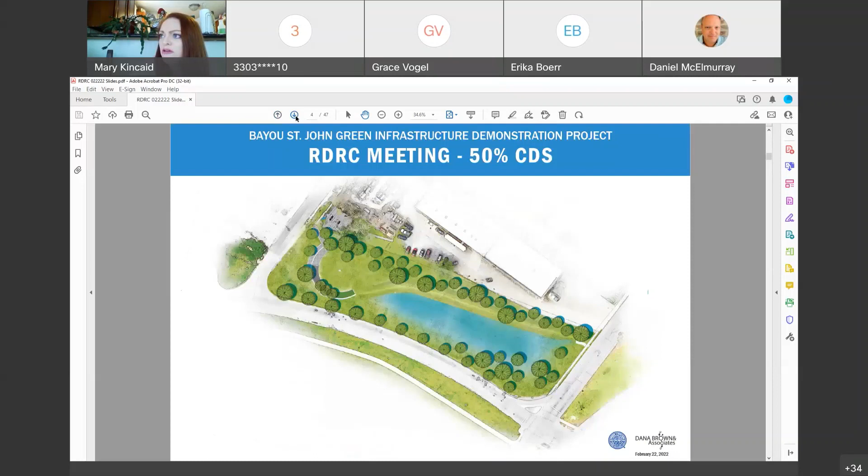for the Sewage and Water Board. Thank you, Grace. Thanks, Mary. I'll intro it, but Danielle and Delaney from Dana Brown's Associates will be actually giving the presentation. This is our newest green infrastructure demonstration project funded by the Sewage and Water Board under our consent decree funds. I'll just let Delaney and Danielle take it away.

I saw them on the call. Are you guys able to unmute yourselves? They might be stuck. Yeah, we can, I think so. This is Jared Zeller, I'm just on the phone. Oh, okay good, got it? Oh yeah, I can hear you now. Go back to mute, okay. Sorry, I was trying to use headphones because I'm at the office today. That's all right. Hi, everyone.

I'm Delaney from Dana Brown Associates, and I will walk you guys through our design.

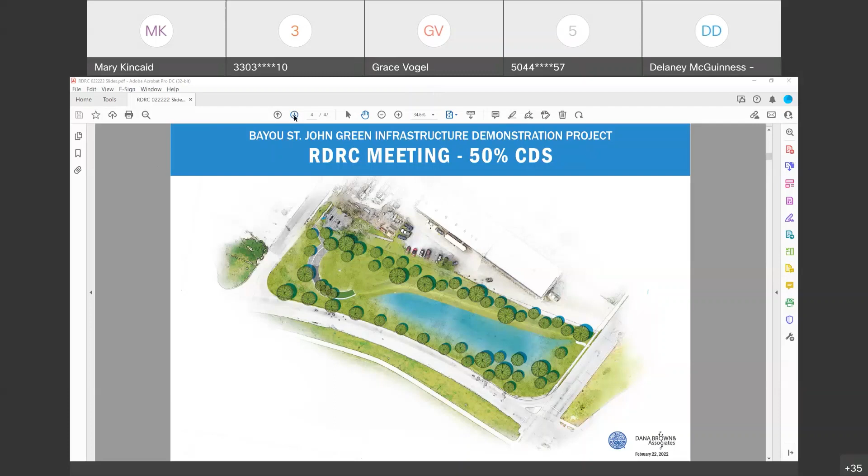So what are we flipping? You guys are flipping the pages? Yes, ma'am, I'm flipping the pages. Can we go to the next page, please? Of course, ready, thank you.

Okay, so here's our site analysis. Basically, we were able to map out the watershed and see where most of the water is going now. It's flowing across the site from this Orleans and Moss Street corner to this asterisk at the Toulouse end of the site. There are two existing box culverts that run under the site, with approximately 4 feet of cover on them. So we don't have a ton of room to do any subsurface stuff, but we have space to work with. There's some existing catch basins and inlets that we can tie into.

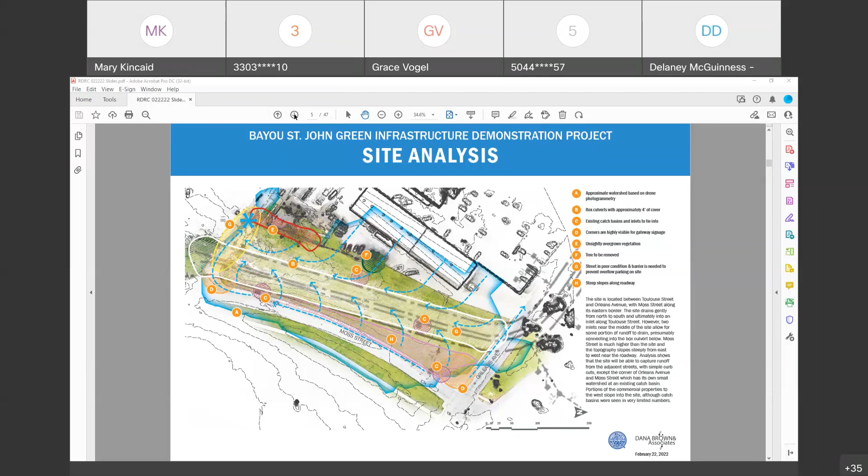There's some surface drains on the site already, and there's a couple of things we need to do to kind of clean it up aesthetically, like the parking bollards and some old vegetation that's dead or out of control. But otherwise, we have a pretty blank slate. So if you could flip to the next one, that just leaves us a lot of space to capture water, and we're trying to maximize that space.

So our design will capture water at the Orleans Street side, where we will put in a stormwater runnel and funnel that water off of the street and the water that's falling onto the site into a large detention basin, and use excavation cut to fill in a berm on the backside of the site, which is significantly lower than the Moss Street curb. Then that will be funneled, if you follow these labeled points, over to point C, where it will go underground into a stormwater drainage pipe that will follow this curved seat wall. It will be evenly distributed into 4 different types of green infrastructure that are equally sized and can be monitored equally and compared for scientific purposes.

And we will have some stormwater monitoring sample catchers out here so that we can do water quality monitoring for a few years to come as part of the project.

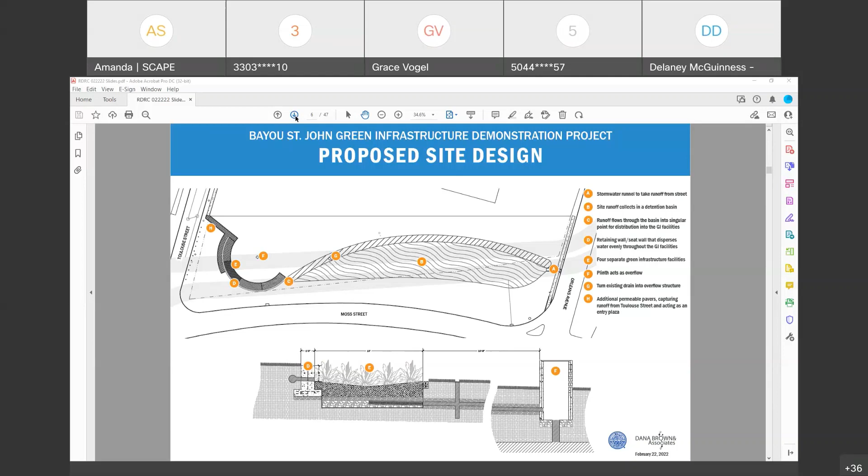And there will be some educational signage out here to explain this as well. We can go to the next slide.

This is our drainage plan. As you can see, as I already described, water comes in from that Orleans Street side and is captured by the berm, so we can detain a large amount of water as it travels toward that Toulouse Street side, hopefully capture it and distribute it into the green infrastructure types, and then measure the water quality improvement once it's gone through the green infrastructure.

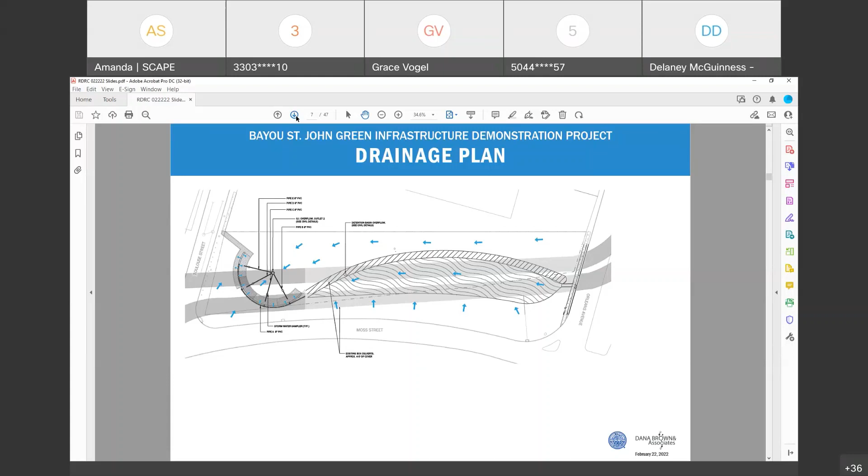Next slide. This is what that water quality equipment looks like. These are little stormwater sample bottles and holders that are installed into the ground. And you replace these bottles every time you take a sample, and they will go off to a lab for testing with our partner Adaptation Strategies, and they will do water quality monitoring reports.

And since we've designed all these green infrastructure types to be exactly the same size, and we are very carefully choosing materials, we can measure the improvement in water quality per storm and over time, because we'll be testing for 3 years after we install these things.

And we'll also be conducting pre-construction monitoring. And then this is an example of what the outflow box could look like. It's just kind of a simple concrete box with riprap in the bottom that helps the sediment settle out and allows that overflow to escape from the detention areas.

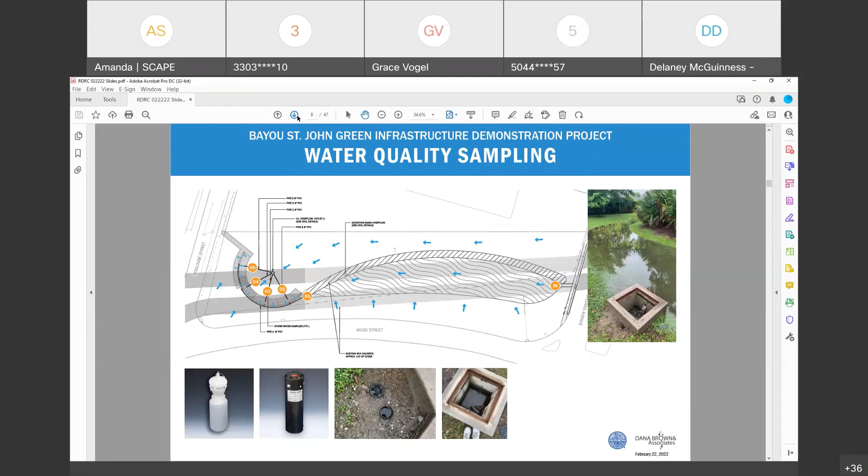Next slide. These are some details of that overflow box from our engineering partner. Basically, each type of green infrastructure has to have its own outflow pipe so that we can do that stormwater sampling. And then they will all converge in the outflow box, which is connected to the box culvert.

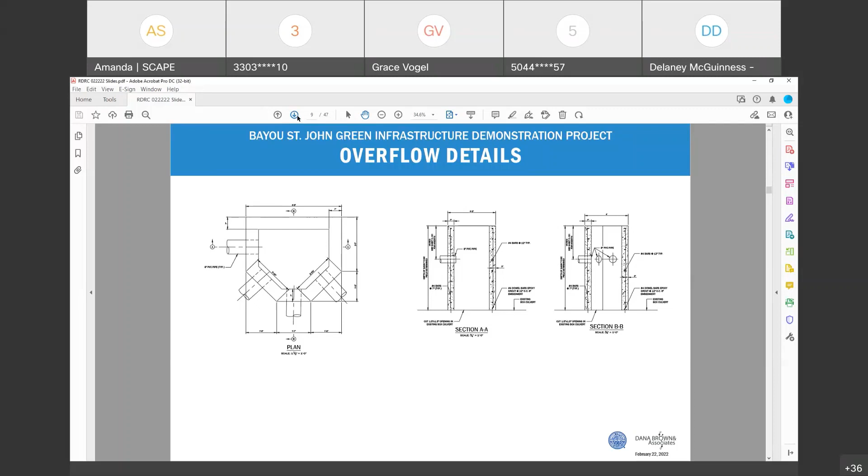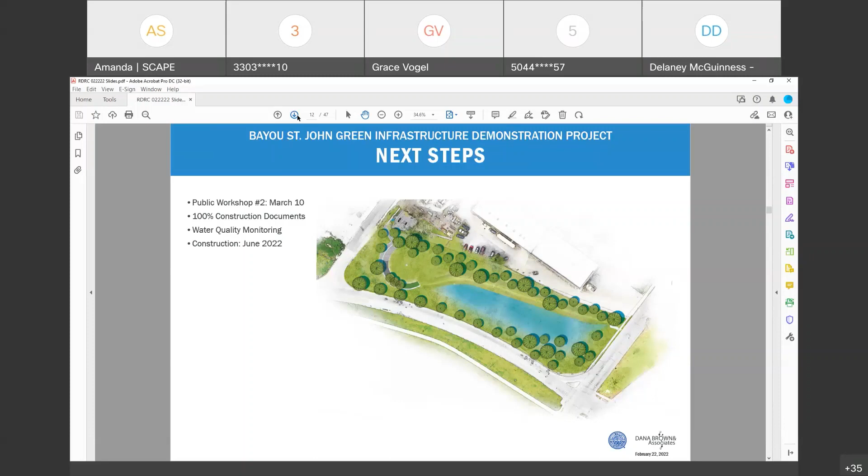Does anybody have any questions? Yeah, thanks, this is Jared, I apologize, I'm on the phone and not in front of the slide, so some of my questions are probably answered by it. I'm happy to hear there are more trees. Sorry, I hear somebody... Anyway. Hey Jared, we usually do committee discussion and then public comment at the end. Oh, okay, gotcha, that's my fault, sorry. No worries.

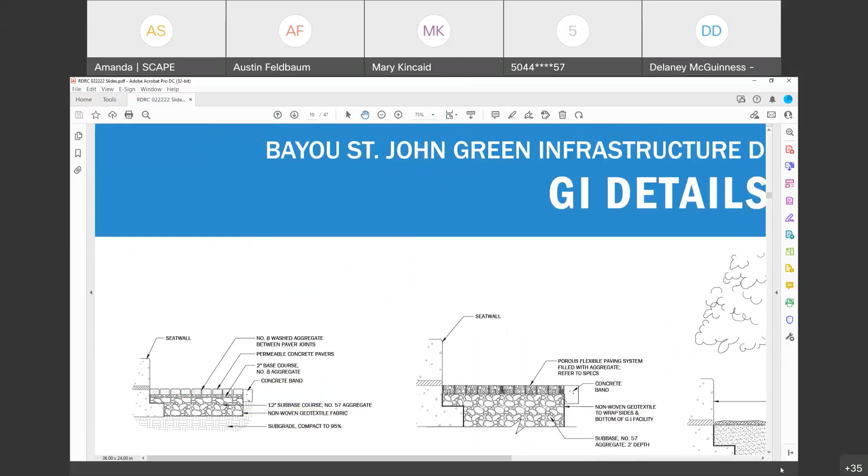Delaney, I was having a hard time reading some of the figures on the slides in your presentation, but roughly, what was the calculated potential stormwater storage volume? Let me look, sorry, off the top of my head. Thank you. We are providing, I think, about 10,000 cubic feet of stormwater storage.

That detention area is really helping us out because it gets a lot of that water initially off the street for us, and then we're able to put it into the green infrastructure types afterward. Each of those types has a smaller storage capacity, but the detention basin offers a lot of storage—about 8,000 cubic feet on its own.

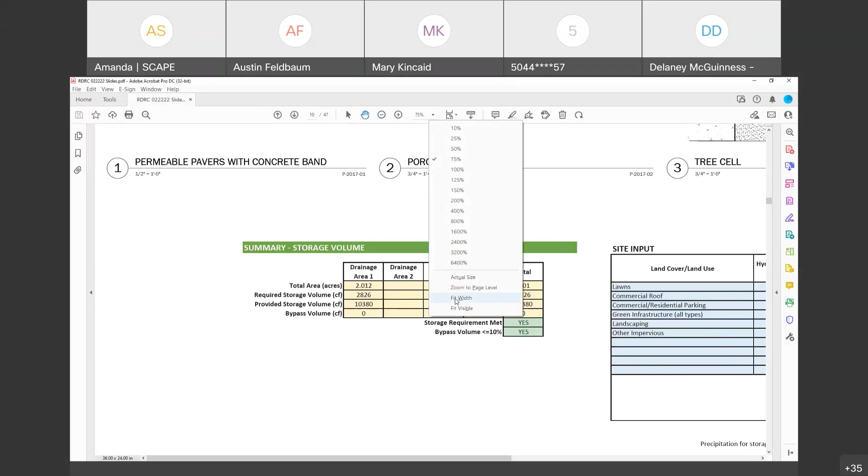Did you do any analysis in terms of what return frequency storm, what magnitude storm the site would be able to accommodate for its watershed? Yes, I can pull that up and give it to you in the chat. Cool. I think those are my only questions, Mary. It's good to see this project moving forward.

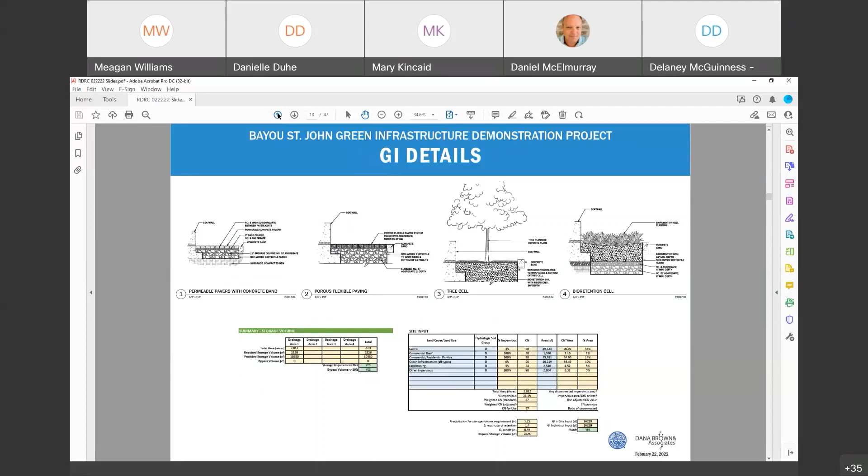Just asking, what is the base course that you're using for the pavers itself? Number 57, double washed limestone, crushed limestone. Okay. I think in the actual concrete pavers—actually in the flexible system—they are then filled with, or there's another layer of number 8, but it's all crushed limestone.

And the flexible paving, is that the True Grid system? It is EcoRaster, which is pretty much similar to it. Okay, I was just curious. And then for the bioretention cell, did y'all look at possibly putting some sort of underdrain there? I can't really tell from the drawings how long it is.

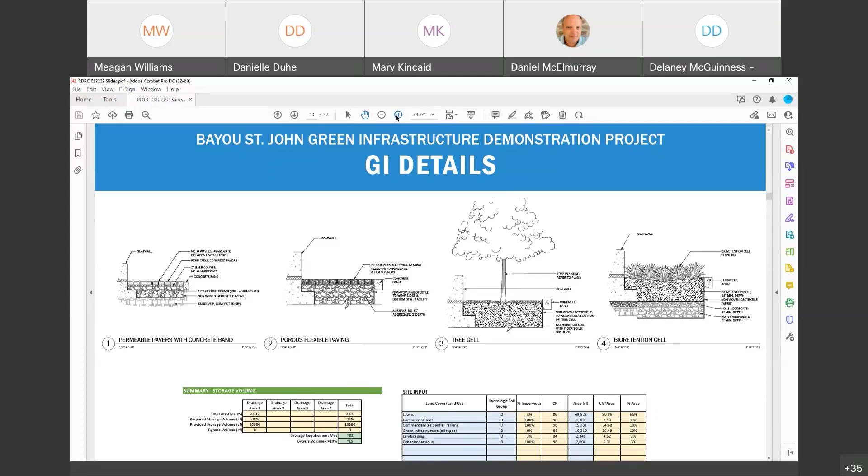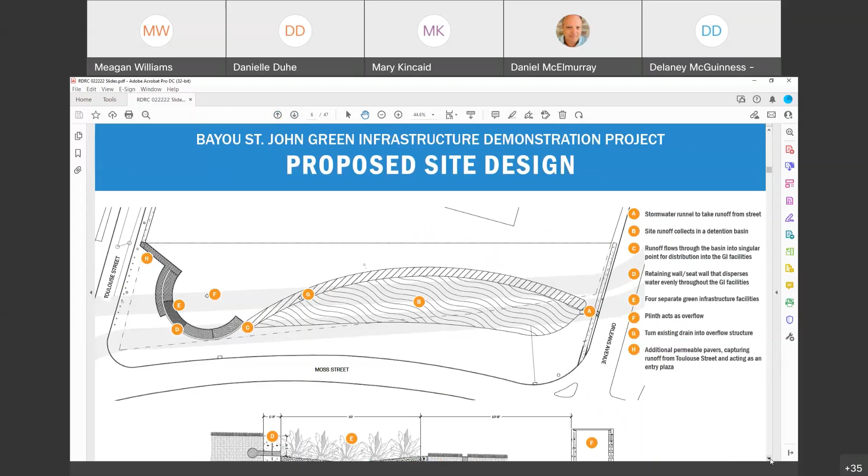I don't see it in this detail, but the detail on the first page with the cross section of the entire outflow process shows each green infrastructure type has an underdrain. Okay, what size are the underdrains? They are, I think, pretty big—they're sized by BKI, our engineering partner.

So I think they're 8 inches. They are 8 inches, confirmed. Okay, that clarifies it. That was really going to be my only comment, that you needed the underdrain, but if you've got it on your other drawings, that makes sense. That's all I have. Thank you.

I have a question. Sure. Reverend Bell asked: Is the whole Bayou St. John, including the pump that pumped the water in or to the lake? The moderator replied: Reverend Bell, do you mind holding your comment until the public comment period? This is our committee discussion period.

Okay, thank you. So we have just a few more committee members. Joe, representing Office of Resilience and Sustainability, do you have any comments or questions? No, I don't have any comments, Mary. Just waiting to see the project get started. That's all I have. Great, thank you.

Sewage and Water Board, Grace, Steven, or Joe Carruth, do you have any comments or questions? I certainly don't have any comments. Thank you, this is Grace. Steven, I don't have any comments either. Okay, and our other Joe? No comment. Okay, so that concludes our committee discussion.

We can move on to public comment just on this project only, or we can move on to the second presentation and take all public comment at the end. Joe, would you like me to dispense with the regular agenda and take public comment on this project since there seems to be some interest in it? Yes, please accept the public comment at this time.

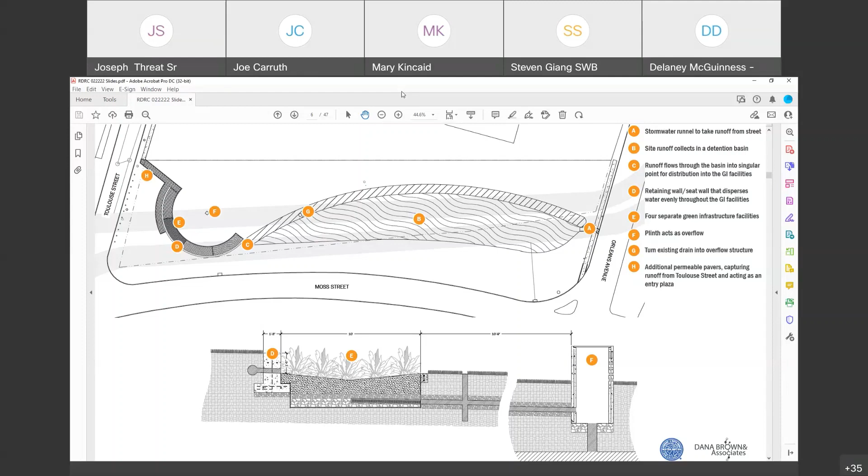I'm sorry, I don't remember the name of the first gentleman to ask the question, but Reverend Bell, if you'd like to unmute yourself and ask your question at this time. Yes, I was wondering, is this the whole Bayou St. John, and also what role the pumping station plays - pumping water into Bayou St. John, or pumping it out at the end? I'm just concerned with that part.

Grace, can you answer that? I'm not sure, but this is just the lot between Toulouse, Moss, and Orleans. It actually sits north of the bayou. So the bayou exists on the south side of Moss Street, so it won't have any actual overlap with how the bayou functions or water going into the bayou. We're taking rainwater off the streets into this particular new project. Does that answer your question? Yeah, thank you.

And I believe we had someone else that wanted to ask a question. This is Jared Zeller with Friends of Bayou St. John. Thanks for hosting today. I'm just getting in front of the computer so I can see the designs now. I'm happy to hear about adding, I think 50 trees is what I heard. Is there a planting plan at this point? There is - if you scroll back to second to last page, I believe.

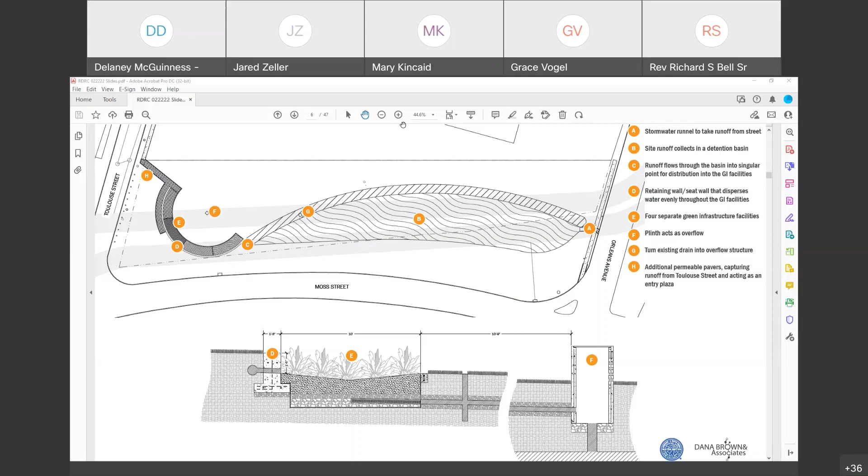Okay, you can do that for me? Okay, great. Yes. And are they going to be mostly on the perimeter or just spread out? So we've got some as street trees and some along the other length of the site. We're really trying to keep them out of the detention basin since all of these pieces of green infrastructure are going to be monitored.

There's a fire hydrant in the middle there. Yes. Are you guys going to deal with that at all, or? It's in use, it's functioning, so it's going to remain there. The last time I used it many years ago, it had a leak, so I don't know if that's ever been dealt with or not. It doesn't appear to be leaking right now, but we will not be removing it, and it's kind of outside of that berm area, so it won't really affect our design.

Got you. So looking at the Orleans side, I heard you talking about pulling the water from Orleans Avenue. Yes. And I think I see in the drawing where it's coming from, more or less. I don't know the infrastructure you're using for that - is that just a culvert, or? We call it a runnel. It's really just kind of a gap in the curb. Gotcha. That will go under the sidewalk, and you might not even notice it. It's very subtle, but it will allow the water to enter the site as if it were entering a catch basin, but hopefully before it enters the catch basin to relieve that drainage pipe.

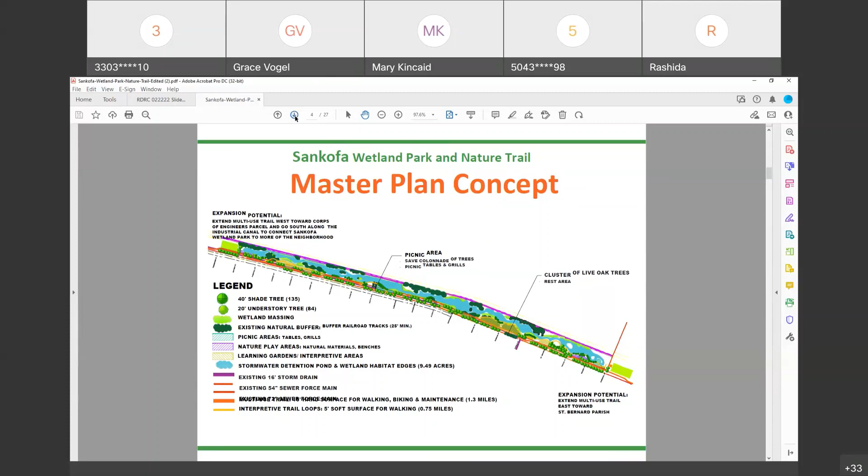One of the primary goals of this project is to support and emphasize the importance of stormwater management, being a model project of how stormwater management can be managed in an urban area, but also actively doing this work. The Wetland Park acts as a sponge. It soaks up and cleans the water to support resilience in the Lower Ninth Ward area. We're currently storing about 800,000 gallons of water in this area, but the intention is to expand that to 8 million gallons of water and reduce flooding.

The wetlands, as all wetlands do, this project will also help to remove pollutants from stormwater runoff because the plants around these wetlands will filter out toxins and chemicals in the water.

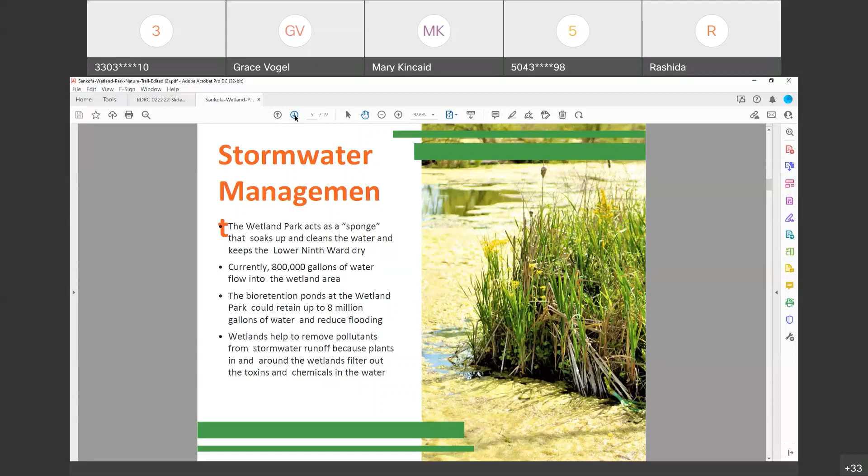We all understand the importance of this type of restoration. It provides an effective approach to flood protection, fresh waters and wetlands, like what the Sankofa Wetland Park is doing. We are addressing the salt water that has impacted wetlands, and we're providing a buffer zone against storm surges.

We're really trying to protect our neighborhoods against hurricanes. The impact of hurricanes, we all know what's happened over the past 15 years, from 2005 Hurricane Katrina to other hurricanes that have affected New Orleans and other parts of Louisiana. So we planted hundreds of cypress trees, which will grow as this project grows, to support floodwater mitigation in the Lower Ninth Ward area.

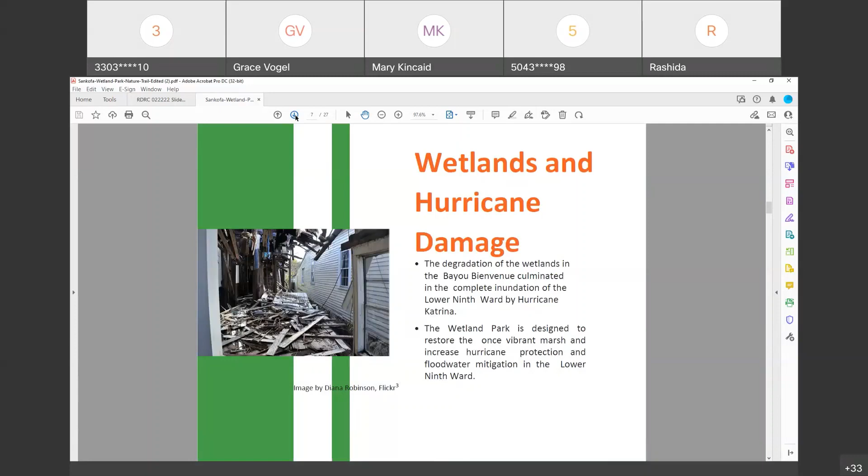Overall, we're intending for this project to support a reduction in property damage, to also reduce temporary road closures due to rain events, and support a feeling of safety for residents, for themselves personally and their property, and also have a carryover into a reduction of flood insurance premiums and increase the property values. So support quality of life and wealth building in the neighborhood for residents.

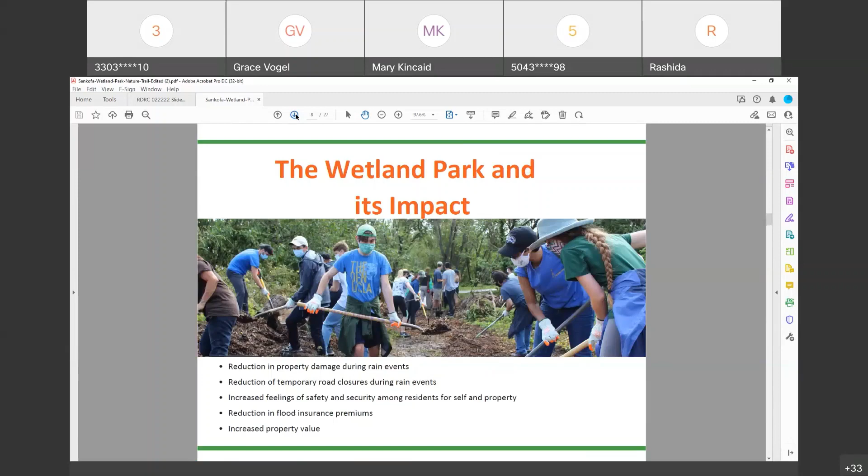She's our Wetland Park Director, and she's going to speak about the wetland ecologies, the ecosystems, the importance of the trees and their impact on health and wellness in the neighborhood, and the wetland habitats, the animal habitats and plant life that's being developed in the park.

Thanks, Rashida. The wetland ecology of these kinds of habitats are some of the most productive in the world, right up there with rainforests. In creating this space, we're creating a very productive habitat for wildlife, in addition to the stormwater benefits Rashida mentioned. It's going to be a shelter for all sorts of animals as well as the native plants that exist there now, in addition to the native plants that would be installed in this space.

And then you have the addition of the retention ponds that would increase habitat for aquatic and semi-aquatic species as well. The plants and soils, as that water comes in from stormwater runoff, will have the added benefit of recharging that groundwater, not only collecting floodwater but also helping with the issue of subsidence as it recharges that groundwater.

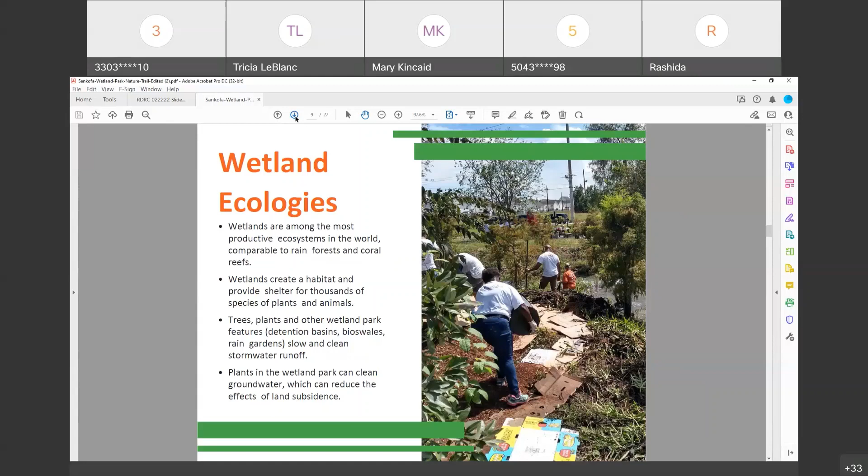Next slide. As Rashida mentioned, we've been working with some folks in academia, and one of the things they've assisted us with is doing calculations about rain events and the impact this project would have on them. So here's some of the calculations we wanted to share with you.

With this project, we're looking at taking a 5.37 inch rain event and, over 2 years, turning it into a 1.58 inch rain event.

So over the 2 years of construction, we've got tallow that we have been removing and will continue to remove, getting those invasive plants out of that area, as tallow is a very invasive plant that is detrimental to other native plants and causes damage to them as they try to establish themselves in areas. And then we want to plant out 40 acres.

Once we remove the invasives, we want to plant out native vegetation, conserve the native plants and trees existing in that space, and add to them with other natives - bald cypress, water tupelo - things that would restore that wetland habitat. Next slide.

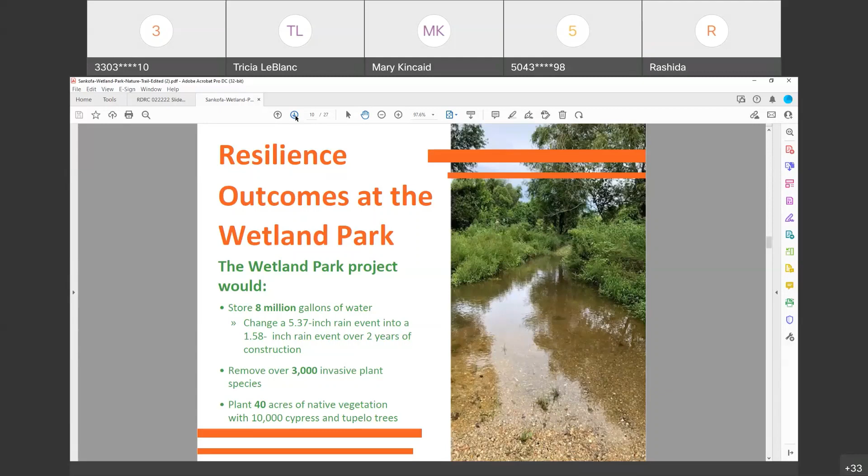Some conservation outcomes we're looking at for the park: in the short term, as we restore this acreage, we're looking at increasing the bird and fish and other wildlife species. Within 4 years, we're looking at a 25% increase. We're already seeing that increase with the space that's already been developed in that area.

We have eBird, and we have birders that go out there and track that. We have a bat monitoring station with Dr. Craig Hood from Loyola University, who is tracking bat species out there. So we're already tracking data showing that species are increasing with the area that's already been developed.

Long term, we expect as the space increases with the bioretention ponds and native plants, and we continue to create this habitat, that would increase to about 85%, which would be a great place for birds, fish, all kinds of animals to really have a place to rest, find habitat, raise their young, and for people to come out and enjoy observing that wildlife.

It's also, as we are interested in healthy spaces for wildlife, we're also interested in healthy spaces for the community. Having this green space provides a lot of mental and physical health benefits to the community that would benefit from it. You've got an increase in physical activity, which provides health benefits.

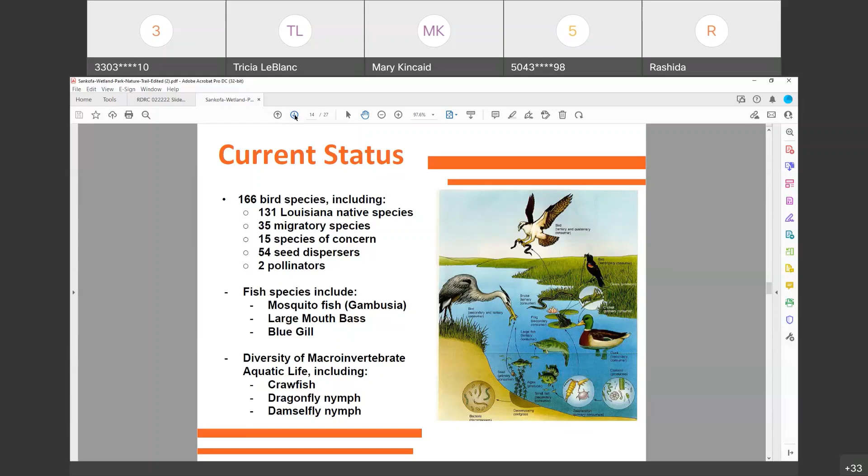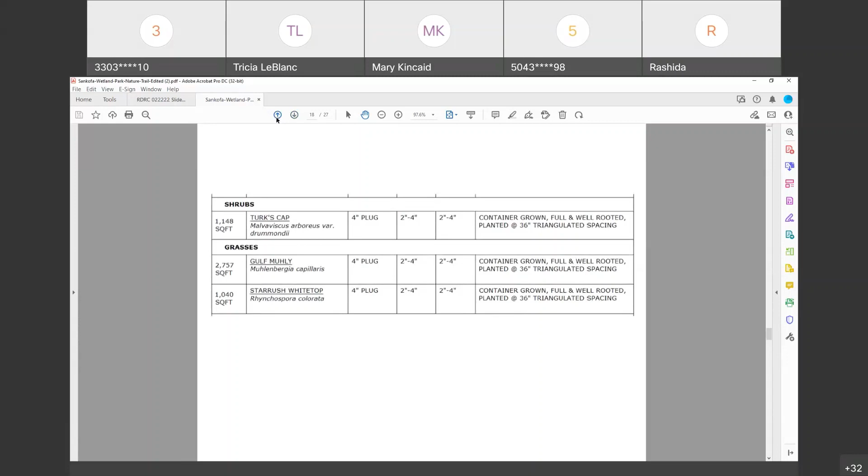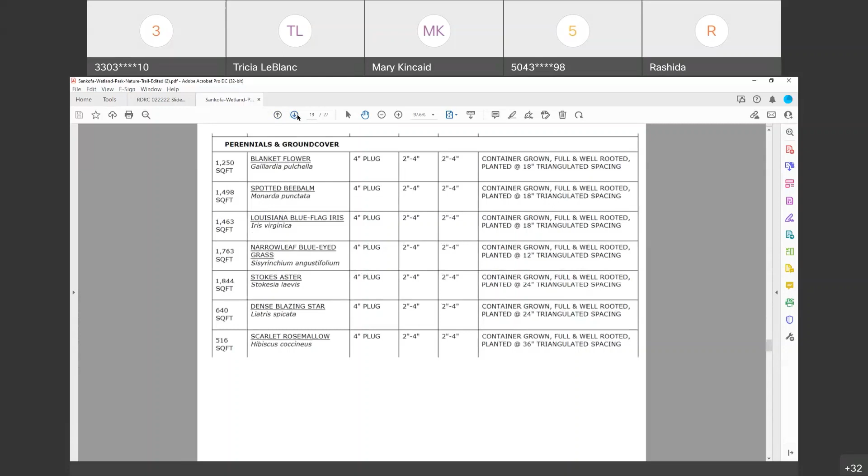And then some shrubs like Turk's cap, and we've also got some perennials and ground cover grasses like Gulf muhly grass, starrush whitetop. Then some native flowers - blanket flower, Stokes aster, blazing star, scarlet rosemallow, things like that. We do have some irises as well, and then we've got some ferns.

So at this point, I'm going to turn it over to Scott Barbary, and he's going to talk us through the engineering components of the project. Thank you, Tricia. As Tricia said, my name is Scott Barbary. I'm with the Planets Design Group. We handled the site design and stormwater management portion of this project for Sankofa.

So the location of the project is at the downstream end of the overall drainage basin within the lower 9th Ward, and the Holy Cross area actually drains to pump station number 5, I believe it is, which discharges into Bayou Bienvenue. So what we looked at in the overall design is how much water ultimately gets downstream to the site. Underneath our project site, there's a 16 by 16 box culvert, which conveys water from the river, from all the subsurface drainage which spans from the river to our site and over to the pump station. So what we focused on in the design, as well as the green infrastructure, is the retention portion of it.

Providing enough detention not only to detain our site and meet the green infrastructure standards set forth from the city, but also to provide some additional storage, which you'll see as we go through the slides here. We're providing much more storage than we need to meet the city codes so that when those box culverts back up and we get heavy rain events, water can store in our ponds versus storing in the streets as early on in a storm event.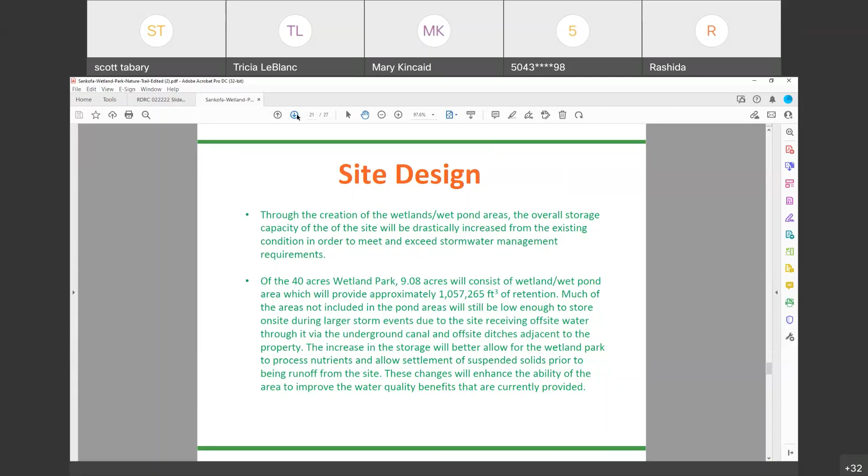Next slide. So here's a quick calculation we put together just to show the pre versus post development peak runoff flow rates from our project. As you can see, based on the New Orleans Green Infrastructure Calculator, we're showing a significant reduction in post-development runoff from our project than what's currently there. We even put it into another program to run some different storm events to see the effects there, and we see similar reductions, greatly increasing the storage capacity of what's currently there on our site.

This is the pollutant load reductions that we're seeing, and this was taken from the Green Infrastructure Calculator from the city of New Orleans. The way we modeled this - keep in mind, I think in reality we'll probably see greater reductions in all of these average annual loadings. The pond in the green infrastructure was designed as just a wet pond, but as Tricia and Rashida have stated before, this is really going to be a wetland ecosystem. It'll be planted as such, so I think we'll see even more filtration than what's showing up in the calculations here.

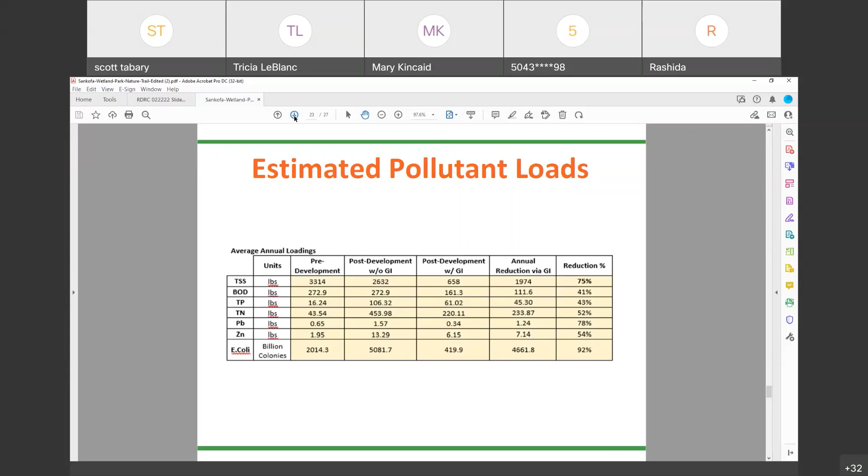Next slide. So as I stated before, the water quality component that we needed in order to satisfy the city's requirement was about 164,000 cubic feet of storage. The storage that's being provided just within the wetland retention pond is just over 1 million cubic feet. On top of that, there will be filtration and other ways to help treat water through the site. The entire site's going to be green, planted with the species of plants that Tricia mentioned earlier on in the presentation. So again, I think this is just hitting on the fact that from a water quality standpoint, there's a significant increase in water quality volume being provided with this project.

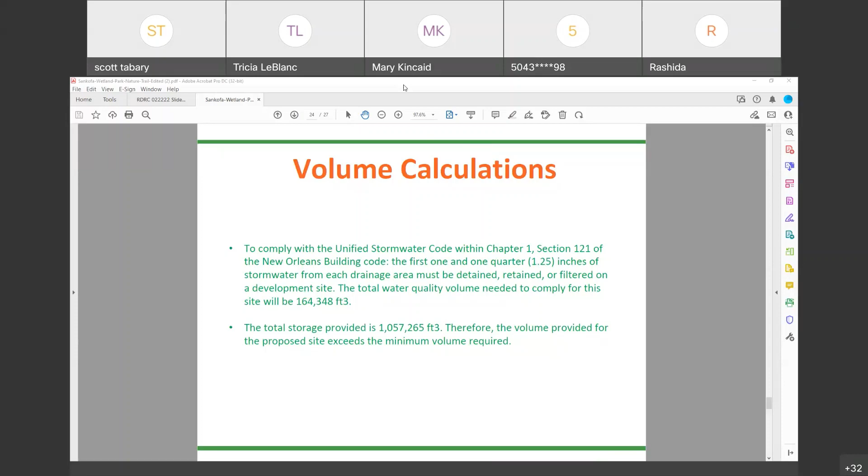Another thing we looked at to make sure we weren't going to cause a negative impact is that a good portion of this site is within the FEMA floodplain, and the BFE currently is -3. The ponds right now are being controlled by kind of like the land weir at the southeast corner that keeps the water elevation generally controlled between -7 and elevation -7.5. So knowing that we are trying to balance the site and reduce the amount of haul off here, at the end of the day, we're coming up with a net increase in floodplain storage on site.

Another thing I want to mention is we have been in contact with the Army Corps of Engineers. They are working on a project that will look to tie some of the city streets in potentially directly into the wetlands pond to help reduce flooding within the streets through the neighborhoods as a part of working with us in this project.

Next, this map's hard to see. This is what I was speaking of before, just showing the sections of our site, and this really shows a large section of the 9th ward adjacent to our project, which sits within the floodplain of AE-3.

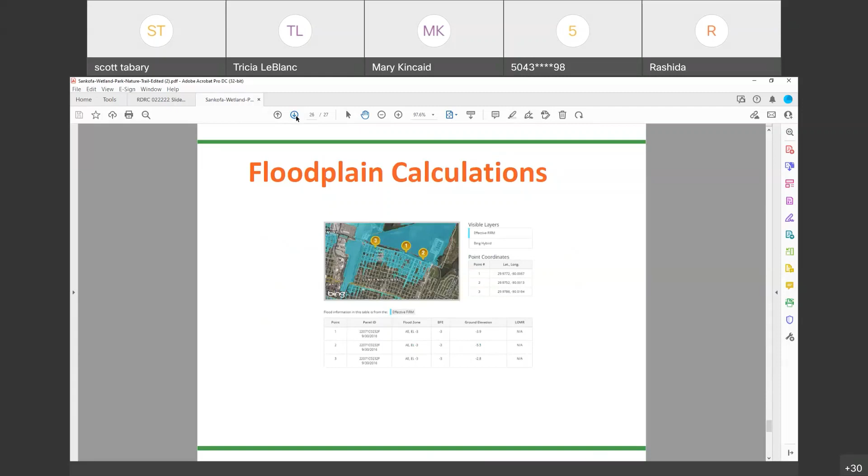That's it. Tricia or Rashida, y'all have anything else to say? No, thank you. Thank you, everyone on the committee, for your time to review, and we welcome your comments and feedback.

And Rashida, can you let the committee know, so you were asked to present to the RDRC as part of your permit process and your submittal to the Design Advisory Committee for city planning. Am I stating that correctly? Yes, that's correct.

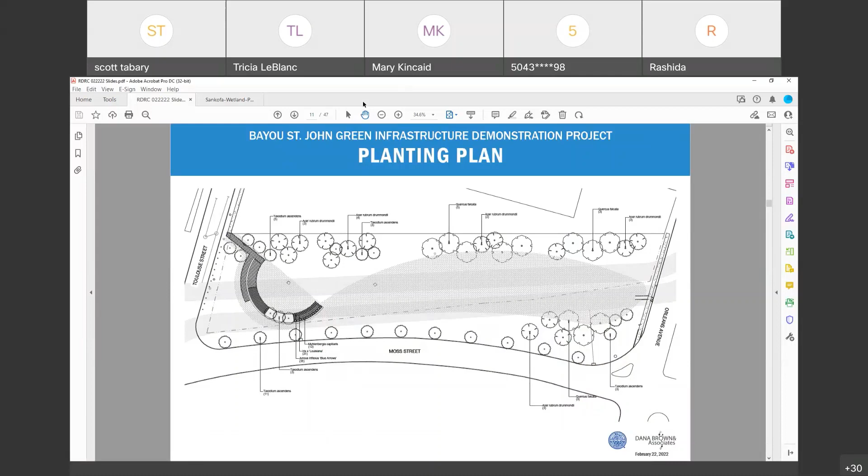Okay, so we'll move to committee comments and discussions. I'm going to ask the same thing that I did before. Austin Feldbaum from Hazard Mitigation, any comments or questions?

Yeah, I think Scott, you mentioned at the end of your presentation there that somebody was working on tying in the surface drainage off of the streets to the wetland park.

Can you elaborate? So I believe the Corps is working on a project right now that's looking at utilizing our project as a way to improve the drainage system throughout the overall development. I think Rashida may be able to speak a little bit more about the Silver Jackets project, is what they're calling it.

It's with the Silver Jackets, yes. So Austin, I don't have much information on what they're doing and how they're doing it. I've been contacted by their engineer. I forget the name of the group that is doing it, but they have asked us to share our models with them so that they could look at the area, make sure that what they're providing is fitting into the SWMM model correctly for what we're designing.

Correct, they're exploring right now. They're engineers with the Silver Jackets group, part of the Army Corps of Engineers, exploring how this project could improve drainage as well in the area. We were awarded this technical assistance support through an Army Corps of Engineers proposal that we submitted. Because we were awarded this, the resources are going directly to the engineers to explore how this may work. So they've communicated with the Sewage and Water Board as well as Scott on how they can start to develop this assessment.

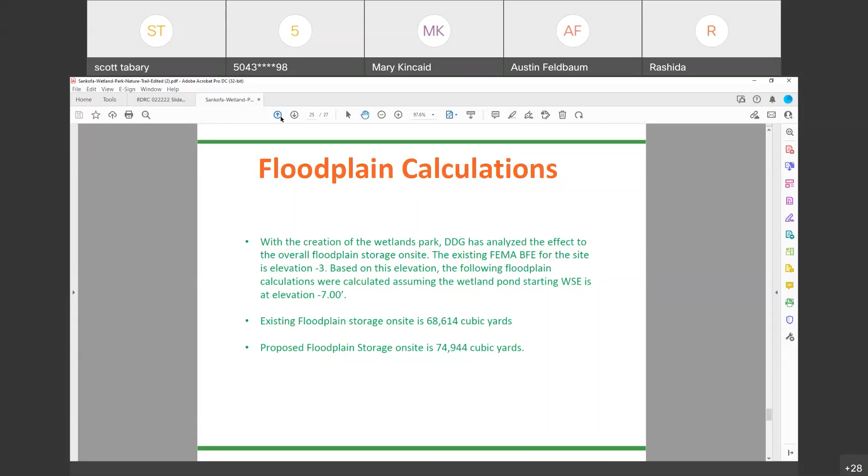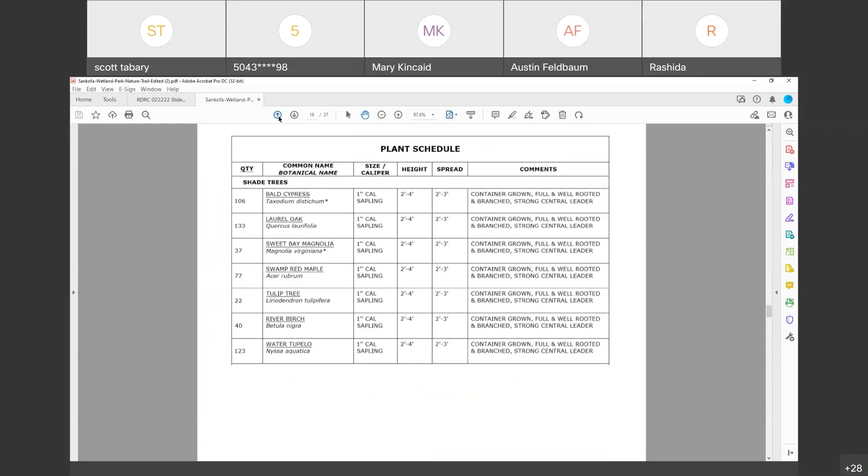Going back to slide 13 in the presentation, there's obviously a lot of benefit to increasing urban tree cover, including its use as habitat and the stormwater benefits. But I think we need to be careful about trying to directly translate the conventional wisdom of urban forestry as it specifically regards heat islands. There's research pointing out that in a subtropical humid climate like ours, the statistics and values you hear quoted from places like the Southwest really don't apply here. So I'd just offer a word of caution about pulling that in wholesale.

And then in terms of the habitat functions of the site, I guess... no, I'll leave it there.

Thank you, Austin. Thank you for your presentation, great project. Aspen from City Planning, any questions or comments?

Yeah, just a comment. This came before our DAC committee, and since then we've gotten a comment, so we just want to get it on the record. I know this is a little out of today's scope since City Planning will be approving DAC plans for this, but there was a comment from Jennifer Kretschmann in Real Estate and Records about the cooperative endeavor agreement. The signage shows this as a park, and that's a conflict with the CEA. So before City Planning signs off on plans, any park signage would need to be removed from the proposal, but we can work that out on the DAC end. We just wanted to get it on the record.

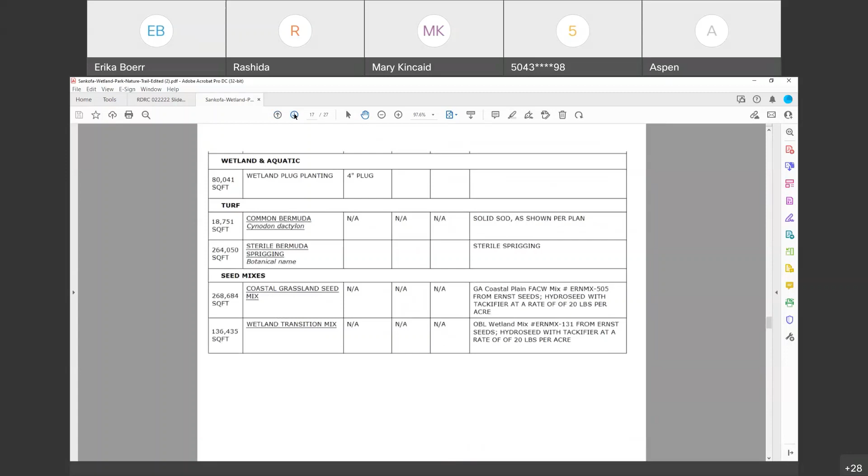And this water, the goal of your 8 million, is that water being absorbed or attracted to this park from removing water from the houses? So it's alleviating flooding on the houses in that area? Overall in the neighborhood itself. So there are houses in this area, places where people live, so it would alleviate flooding that impacts people's homes.

Okay. Well, those are my questions. Thank you.

Thank you, Erika. Danny McElmurray with Parks and Parkways. I was able to look at the drawings, and we had the DAC in terms of planting. I don't have any issues. I know y'all have been working on removing the invasives, which I think is crucial to the success of other planting, and you are retaining quite a few trees. Have y'all worked with...

Is there a railroad right of way along there, or some other kind of right of way along the edge, like a levee or something? Can't remember. There's a levee along there, yes. We're constructing outside of that right of way. We're actually seeking a levee permit right now from Southeast Flood Protection Authority East. Okay, that's what I was getting at.

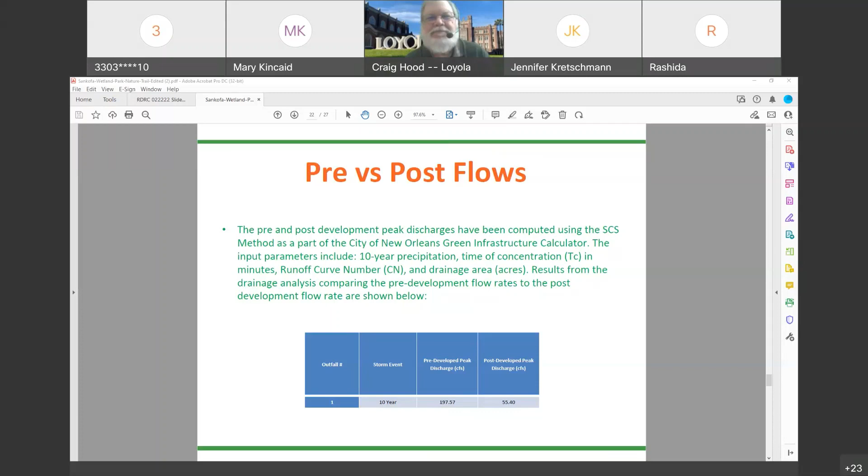Great, thank you very much. Hearing no further comment from the public, I will ask the committee members for a motion to approve the Sankofa Wetlands Park for a permit. Mr. Errol has a comment.

Oh great, thank you. Yes, I'm a lifelong resident of Lower 9, and Florida Avenue has never had any activity except for blight. For this park to come along, it's a place for a lot of these kids to go to not get in trouble. That's a sanctuary where when I was a kid, when I seen my friends wanting to go to the left, I went fishing, and I learned a lot from the older people who were out there, and till death, those people became my friends. They taught me a lot about life. And I've gone to the park on many occasions to just get fresh air, to just see the progress. There's so much progress that has been done there in the last year or so since I've been knowing about it.

I don't see why we could go against this at all. This would be a great asset to our community and people from all over. That's pretty much me. Thank you so much, Mr. Errol. We appreciate that.